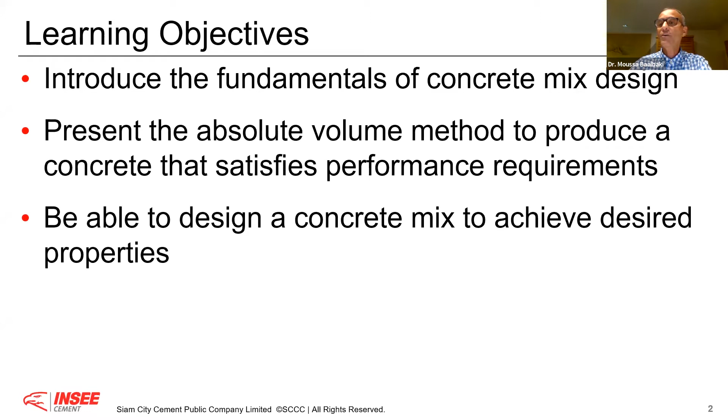It will be, for example, to design for the hotel terrace in Galle Face a slab that is a reinforced concrete slab. You are requested to design this reinforced slab. It is a 200 millimeter thick slab, exposed to airborne salt but not in contact with seawater. That is important to mention.

The specified characteristic strength will be 25 megapascal at 28 days on cube, and the slump requirement will be 15 centimeters plus minus 2.5. Now, from statistics, there will be more than 30 consecutive tests available, and the probability that the average of 3 consecutive tests is smaller than the specified characteristic strength is 1%, with 2 MPa standard deviation.

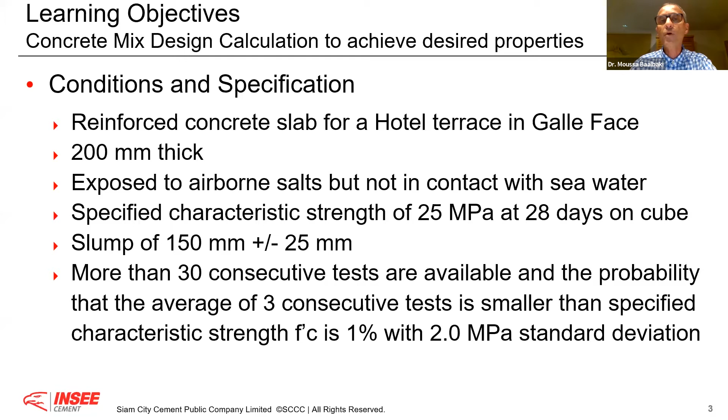I just started with this slide because I want you to see already from the very beginning what you could expect for the next, let's say, hour and a half. That will really be the objective here. I would like that at the end of this session, those who are not used to concrete mix design will be able to translate all these requirements into a specific concrete mix. That is really one of the most important learning objectives for this session.

Now, if you talk about concrete, it is a very simple, but at the same time, very complex material. It is simple because very often people abuse the simplicity of concrete, because when you look at the ingredients, with 4 simple ingredients we can find in nature, the aggregate, the sand, the water, and the cement that is processed, you can produce a concrete where the range of compressive strengths can go from 1 megapascal to 100 megapascal.

You see, this is really what is important to say here. It is simple, yes, but the technology content is very important.

I just try to do some analogy. You have a flour, a good quality flour. You can give it to one person who will make very nice, tasty bread. Another one, it will not be exactly what you expect. Therefore, the difference will not come only from the ingredient. The ingredients are important, we will see it, but what is important is really the technology content.

Therefore, it's not as simple as very often people think. A concrete mix is not a concept of 'I have done it before, I can copy paste it.' That is not the concept we should use.

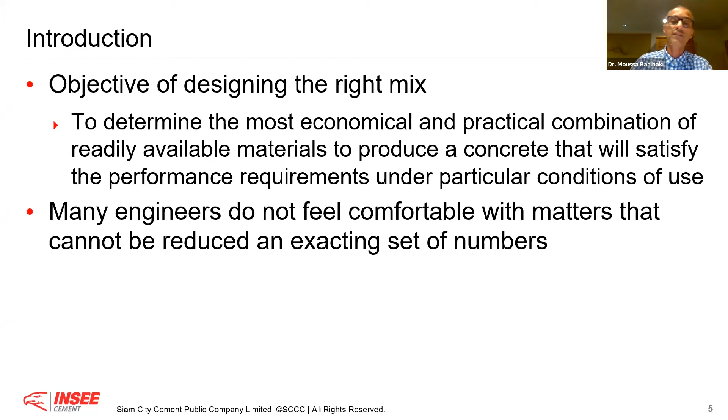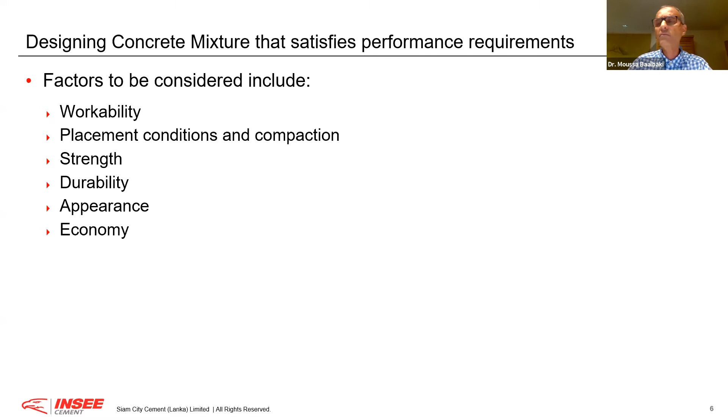Designing concrete that satisfies performance requirements, I have here six of the most important properties. Workability means how easy I can place a concrete, and very often we talk about slump. I'll show you according to EN standard there is another way to express workability. Also the placement, we can consolidate concrete in different ways.

This is why very often when we design concrete, we should understand upstream, before the concrete arrives downstream, how it's going to be transported, how it's going to be placed, and how it's going to be consolidated. These are really important because if we don't take this into consideration - I like workable concrete, but if I place it knowing it will be highly vibrated, I can have segregation, I can have bleeding problems. So this is all important to take into consideration.

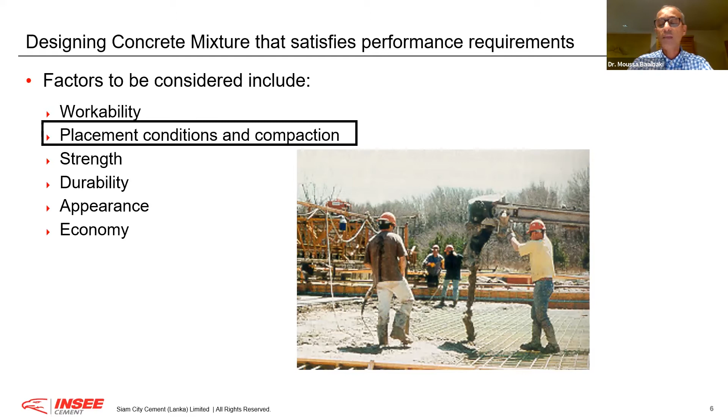After that, the strength. As an engineer, we know this is one of the most important engineering properties. When we talk about structural stability, mechanical stability, we talk about compressive strength - this is really the strength of concrete. Concrete has a lot of advantages and benefits, but probably one of its weakest points is tensile strength, that's why we put reinforcement. But when we look at the strength of concrete, you can easily design concrete up to 100 megapascal.

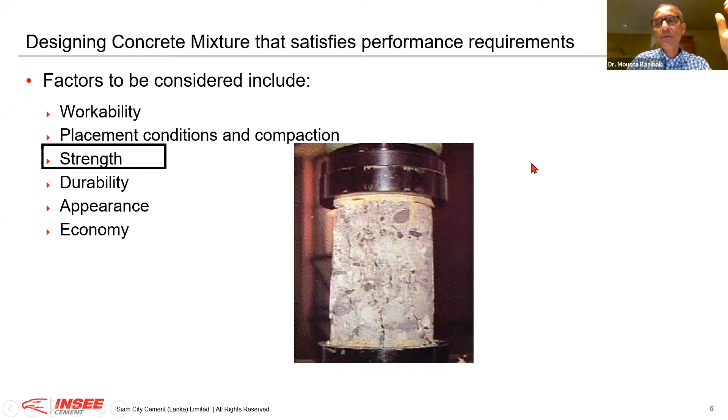One other aspect important to satisfy performance requirements is durability. The aspect of durability is really important, and we often miss this because when we design, it has to last the intended use of the structure. For example, if I build a bridge for 50 years, I don't want that after 25 years I need to repair the bridge - this has a very high social cost. Today most bridges around the world are even designed for more than 75 to 100 years. That's why durability has to be taken into consideration.

We will see it. After that, appearance - the color. As an architect, I started my studies in architecture, and with concrete we are able to give more feature to a building. If we take, for example, fair face concrete surface, we can have warm color, we can have cold color, and concrete is the best material for that. You see, for example, in this school of architecture in Marne-la-Vallée in France, there's fly ash on the right side and slag on the left side - that's beautiful, that gives volume. In terms of aesthetic, I would say nobody will deny this is really a kind of art.

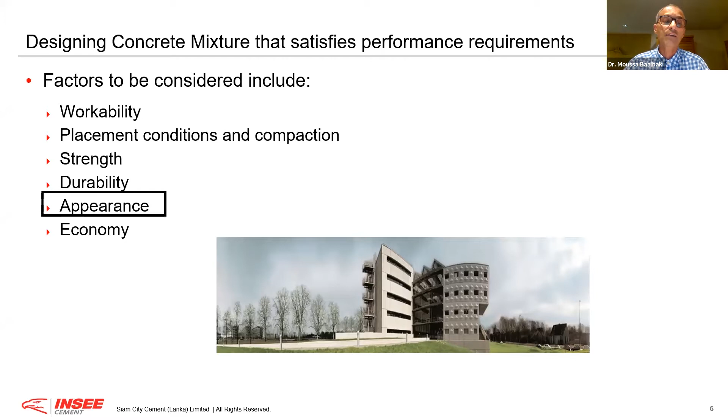Also important is the economy part - we have to be cost effective, of course. But I would like to mention something very important here.

We are consumers. If I go tomorrow and buy a TV, they'll give me the latest technology with maximum 2 or 3 years of guarantee. If I buy the best tire for my car, the Pirelli or whatever state-of-the-art tire, the guarantee is maximum again 3 years. I'll pay about $100 US for one tire, and that latest technology will last 3 years. When we take concrete, if we design it correctly, it can last minimum 50 years. Therefore concrete is a very noble material for engineers. And when I say 50 years, this is for a cubic meter that will cost you less than $100 US - 2.5 tons of different materials that will last 50 years.

This is why if you look around you today - schools, our houses, our universities, our hospitals - whatever you look around you is built with concrete.

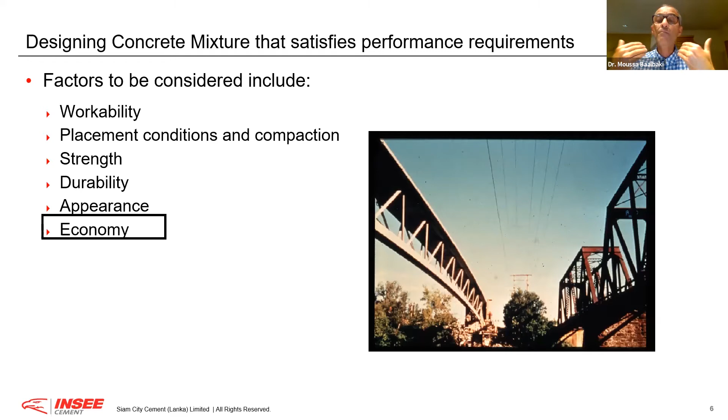In front of you, you have challenges. You need to build sustainable, performing infrastructure. Sustainability becomes a very important element in concrete mix design. You have to think about where the solutions are. Therefore you need to think performance-based and not prescriptive-based.

Now, in terms of method of proportioning, when we design a concrete mix it involves: the establishment of specific characteristics, as I said, in terms of strength and workability, the intended use, the aspect of exposure condition, and also the selection of proportion of available materials with the greatest economy.

You see, I mentioned available material, and that is very important here. When I talk about availability of material, today we are more going toward circular economy.

And when I say circular economy, we are not anymore dumping. We cannot afford anymore to dump end-of-life material. Therefore, concrete—when I come to available material—the second life of concrete is as a great aggregate. Yes, it's a great aggregate.

You see, this is an issue. The implication is if we dump it, we are going to create a big mess. Therefore, the opportunity is to take this end-of-life demolished concrete, turn it into aggregate for example, and design a concrete taking this recycled aggregate. This is just an example.

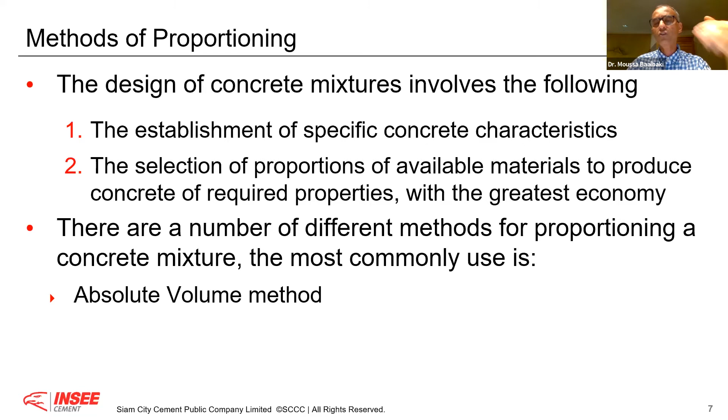The method of proportioning, absolute volume method, is very simple. Everything is transformed to a cubic meter, made of 1,000 liters. You have your constituents: cement, aggregate, water, and sand content, and a certain porosity. I'm not talking about admixtures here.

I will come to the part of admixtures, because the volume there is very, very low. But if I take the big volume in my cubic meter of concrete, these are five somehow constituents—4 constituents plus the porosity. If you know the bulk density of each of them, if I divide the mass by the density, I will have my volume. And if I sum up all this, I should get my cubic meter.

I would like to make a small break here, because when I call my ready-mix guy and ask for concrete, I will never tell him I need 2 tons of concrete. You agree with me? I will tell him I want 2 cubic meters of concrete, therefore it's volume. But of course, in some segments, if I take for example the individual house builders, the retail segment in Sri Lanka or in a lot of countries...

We still see people, when they mix on site, they mix volume batch. They don't weigh, they go volume batch.

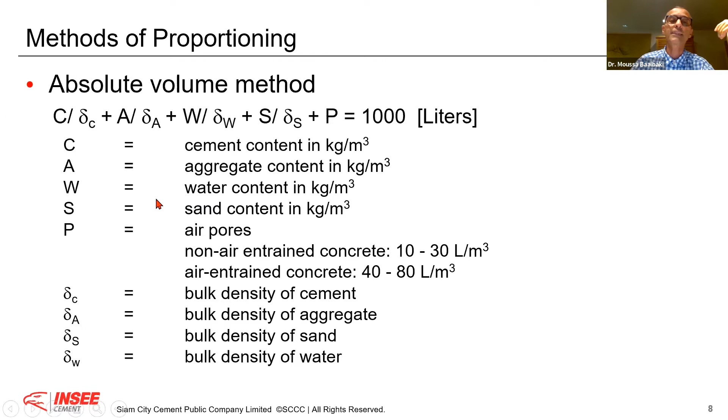A concrete, as I said, we express everything per cubic meter. If I have, for example, 1 cubic meter of concrete with aggregate, with sand, with cement, with water, each of them will occupy a certain volume. Say air will have 6% of air, this will be 60 liters. Water, 150 liters. Knowing the density of each of them, I can get the kilogram per cubic meter. Therefore, I can get really for 1 cubic meter of concrete the constituent kilogram per cubic meter.

Therefore, always when you are somehow designing a concrete, you should come up at the end with kilogram per cubic meter. That is important.

Now, selecting a mix characteristic, you have to take into consideration the intended use of the concrete, that is one aspect, and the second one is the exposure condition. These are two important elements that you should consider: the intended use, and second, the exposure condition. Is it a house? Is it a bridge? And where is this house? Is it in Kandy or is it in Galle Face? That is important. This is what we talk about exposure condition.

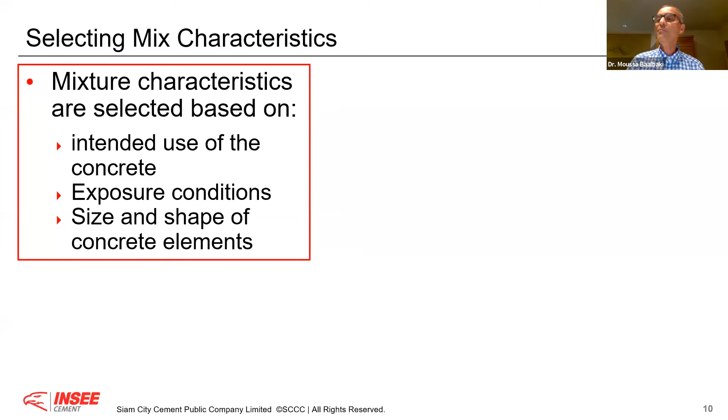That is where we will start. Now this is why we will go through what I call the important steps. We start with step 1: as an engineer, I need to know what is the strength requirement.

This I cannot invent, I should know the strength required according to the design. After that, there is one important element, the water cement ratio. Because there is a law, a very simple law in concrete technology, up to 50 megapascal: there is a linear relation, they call it the Féret relation or the Abrams relation, where the water cement ratio is linear with the compressive strength. When you reduce your water cement ratio, you increase your compressive strength, or when you increase your water cement ratio, you reduce your compressive strength. Therefore, it's almost linear, and there is no universal one, it will depend on the raw material: cement, aggregate, sand that you are using, and the mix.

After, the coarse aggregate. You see, coarse aggregate is not inert. Coarse aggregate plays a very important physical role in the concrete, because coarse aggregate will occupy a big volume of your concrete, almost, I would say, 40% of the volume, even sometimes more, occupied by the coarse aggregate.

After knowing the workability, we have to know how much water I should add in my concrete mix, because water is a very important ingredient - it will hydrate your cement. We'll see this in the second webinar. But at the same time, if we put too much water, it's not good for the concrete. The cement content, how much cement I should put, is also important to know.

The cement type - there are different types in the market. It's very important to understand why we have different types of cement; there is a good reason for that. Admixtures are also important to use when available, for example water reducers, or what we call super plasticizers, because those admixtures will help you reduce the amount of water. That is very important to take into consideration.

At the end, when we go from step 1 to step 9, we are able to fill what is left in the cubic meter with the sand. So these are the 10 important steps, and after the 10th step you do what you call the moisture correction.

Why do I say moisture correction? Because if you go to the job site and look at sand or aggregate on the piles, very often they are not what we call saturated surface dry. Therefore they are either wet or too dry. You need to do a moisture correction to assure that you always have a mix design with the same water-cement ratio.

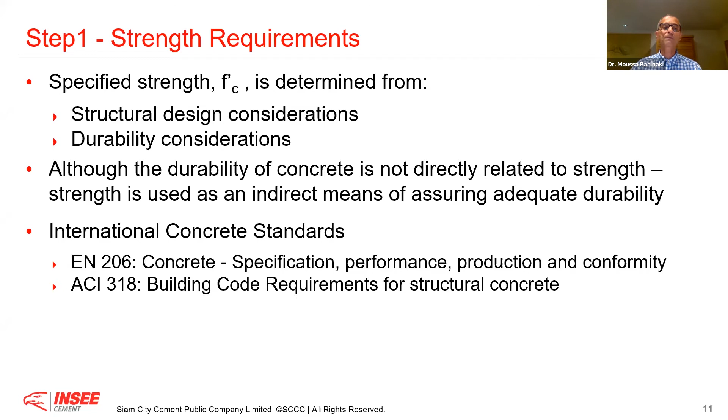When it comes to EN206, we need to know how to design and what elements we need to specify to let the producer, for example in concrete, fulfill the requirement of the engineer or contractor requesting it. The EN206 gives indication on how to design concrete with a service life of at least 50 years, without major intervention in terms of repair or rehabilitation.

Of course you can go above 50 years, but if you follow the different steps, you should not have any problem. First you have the class of compressive strength. Strength is important, and when I design a concrete this is the most important engineering property: the class of compressive strength. Second is the class of consistency, which is fresh concrete properties, for example which slump I need. That is important, I should specify.

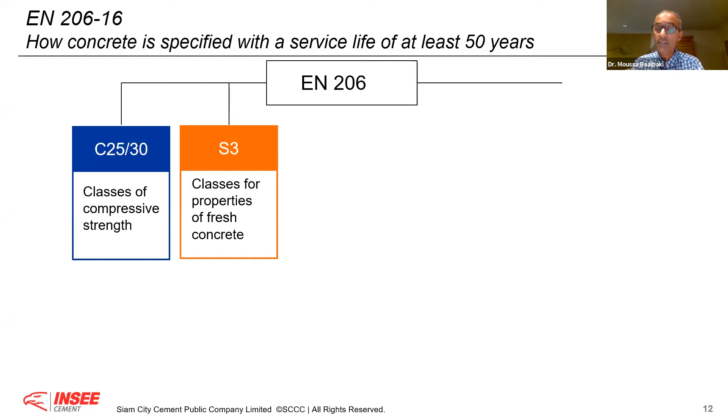The third one is the class of chloride, because you can have concrete exposed to chloride like marine environments. It could even be not marine - you can use chloride to melt snow in the mountains. This chloride can somehow, to a certain extent, have a negative impact on corrosion. But at the same time, in your concrete you have to limit the amount of chloride, for example 0.1%, very often used, up to 0.4, depending on if the concrete is reinforced or post-tensioned. Therefore the class of chloride content is defined in the standard.

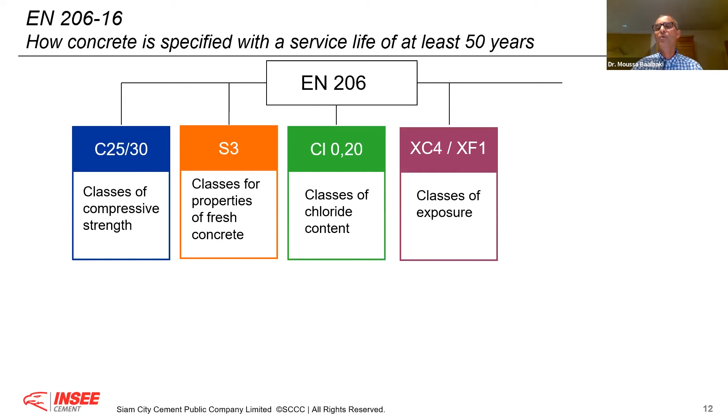Now very important is the class of exposure. This is very, very important, because when I design the concrete I should know, during its lifetime, what kind of exposure this concrete is going to withstand. Is it going to be wet always? Is it going to be always dry? Or is it going to go through different cycles of wetting and drying? Is it going to be exposed to chloride, to carbonation, to CO2, to sulfate, whatever it is? It's very important to consider this aspect in concrete design.

Last but not least is the maximum size of aggregate. In Europe, according to EN206, when I call the ready mix I have to specify these 5 boxes: a C25/30 concrete, an S3 class of consistency, a chloride class 0.2, an XC4 exposure class for example, and a maximum aggregate size of 32. The producer takes this input and translates it into a concrete mix design - that is what I would like to do with you.

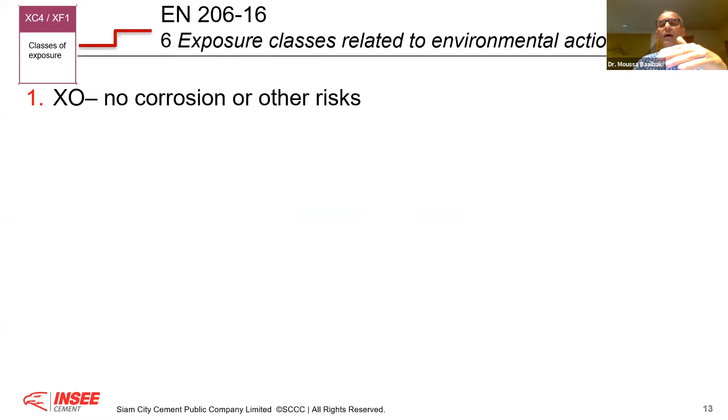Now when I take the exposure classes, there are 6 exposure classes according to EN206. When you look at the ACI, the American standard is similar - not exactly the same, but very similar. You have, when there is no corrosion or risk, this is X0. Very often these are for lean concrete, or for some foundations where the soil is not contaminated and it's not reinforced - in this case we can go for X0.

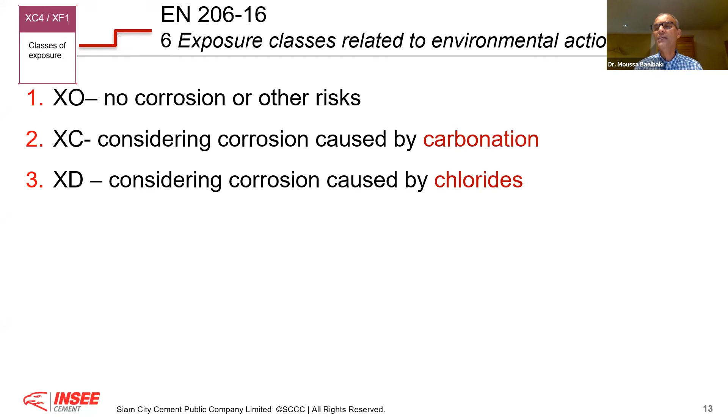XC is when you have problems with carbonation - if your concrete faces an environment where soluble CO2 can enter and carbonate the concrete. We will see this - this is a corrosion mode. The second mode of corrosion is the XD class. XD is when you have chloride, but not coming from the seaboard like XS. Chloride, as I said, can come from icing salt, or it can also be a byproduct from industry.

So chloride can come from different sources, but also from the sea. In Switzerland we don't have sea, so the XS class does not exist in the EN206 with the National Amendment of Switzerland. But in Spain, they have XS because Spain has the Mediterranean Sea. After that, you have frost. In Sri Lanka we don't need frost, but in a country like Switzerland or Canada, they have winter, with many cycles of freezing and thawing, and they also use icing salt to melt snow on roads.

Therefore, you need to take this into consideration. Last but not least is the chemical attack, from the soil, from the groundwater. It's very important to see, for example, if you have some acidic attack, if you have some sulfate, these are all very important to take into consideration.

Now, I am not going to go through all of them. I will just consider the XC. If you understand the XC, you will understand all the rest, because I will show you a table, they are all based on that. I will not go too deep, because we will not have time to explain the mode of deterioration of each of these exposure classes. This could be another topic.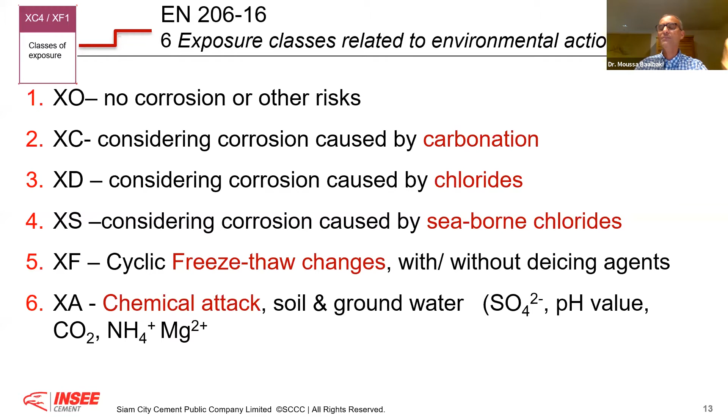Now, when I take the XS, this is chloride from seawater. We have three classes: XS1, XS2, and XS3. XS1 is when the structure is near or on the coast. Example, Galle Face for Sri Lankan people, because I know there are some participants from abroad, from India, from Korea, from Malaysia, I don't know from where also. But here in Sri Lanka, we have Galle Face, for example.

It's a very beautiful avenue and is facing the sea. Therefore, all the buildings, all the concrete that has been built in the area of Colombo need to consider a minimum exposure condition of XS1. That is important.

Second one is when the concrete is part of a structure, either permanently submerged or in the tidal zone. Can be a bridge, for example. Therefore, if it is permanently submerged, you take the XS2. And if it is in the tidal zone, or spray zone, you take XS3. So you see, it's not just about chloride from seawater. It depends where your element is.

Now, there is some recommendation. This is recommended in the EN 206. It's not mandatory, but it's recommended, and it's good as young engineers that when you start to design your concrete, this is a very interesting table. There is more than 25 years of back experience backing this table. That is very interesting because you can use it.

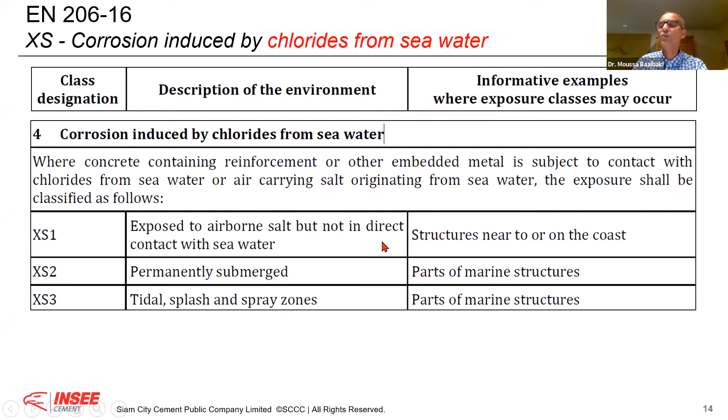Even if we are at 25 kilometers from the coast, therefore I will say Colombo and the big Colombo, normally all the concrete needs to be designed minimum with XS1. This means water cement ratio should not be above 0.5. So you see, 0.5, this is one condition.

And we are talking about strengths. You cannot design with less than 37 megapascal. Even though from a structural point of view, you can design with 25 megapascal, that is enough. But due to the fact that you have exposure condition with a certain severity, you need to increase your design to 37 megapascal.

Therefore, we are talking about the same thing. You have different cases, like if you go to XS2 and XS3, this is either submerged in water or in the splash zone. You see the strength is 45 megapascal. Even though probably 35 megapascal will be enough, or 30 megapascal will be enough. But this is not the case. You have to take into consideration the exposure condition.

Now, if I take the ACI, you see, they have 4 exposure classes. They don't have 6 because they already include in each of the classes what we have in the European standard, the X0. That is what they call F0 for frost, S0 for sulfate, that is our XA. This is our XF according to the European standard. This is in contact with water.

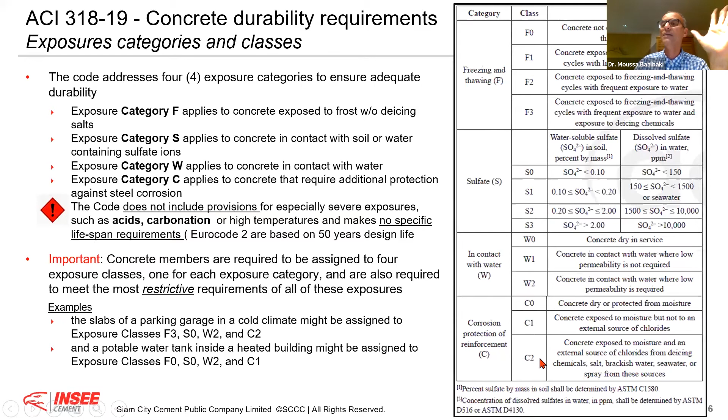Therefore, the engineer needs to consider all of them and take the worst case scenario. They also have limiting values, exactly like in the EN. What they don't have is a restriction on the cement content. In the EN, the European standard, you have the minimum cement content, the maximum water cement ratio, and the minimum compressive strength. In the ACI, they put only requirement on the maximum water cement ratio and the minimum strength. They don't put restriction on the minimum cement content. That is really the big difference.

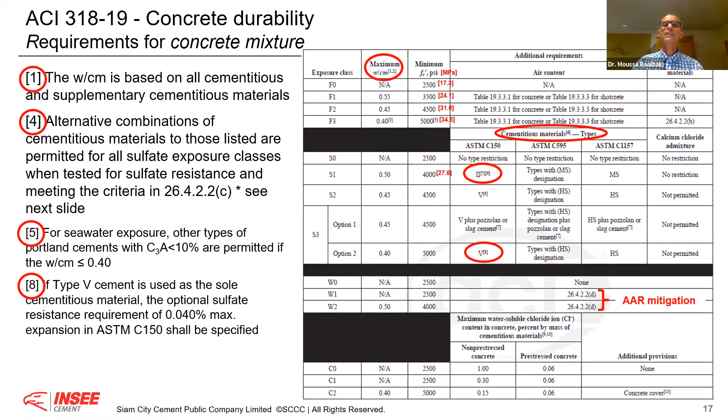Now, as an engineer, when you design, the required strength should be equal to the specified strength. So if I'm specifying 30 MPa, I have to take an allowance for variation in materials. This is why, if you buy concrete, you need to buy it from a producer who has a very good quality assurance system, with a very good standard deviation, with enough number of consecutive tests for the mix he is developing for your project. That is important, you have to take this into account.

For example, in Sri Lanka, whenever you design 30, you request 40. I will explain why. This is important because of the normal distribution for standard deviation. With standard deviation, if you specify, you have to add, for the design, a factor K multiplied by the standard deviation.

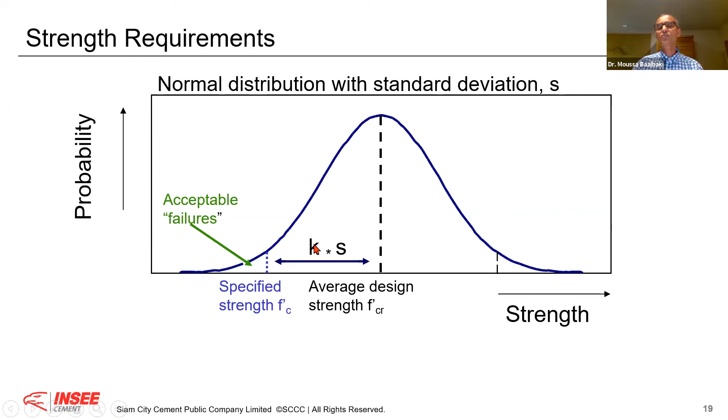This factor K, if the number of consecutive tests is more than 30, equals 1. Therefore, a professional ready mix operator normally will just add the standard deviation because the K number should be 1 for him. Now, according to ACI 318, if you look at the Sri Lankan cases, you will have also very similar conditions. If the concrete is below 45 or above 45, you have different conditions.

The required strength will be specified plus 1.34 standard deviation, or another equation, depending on whether the probability that the average of 3 consecutive tests is smaller than the specified strength is considered. Therefore you take this relation. That is really important.

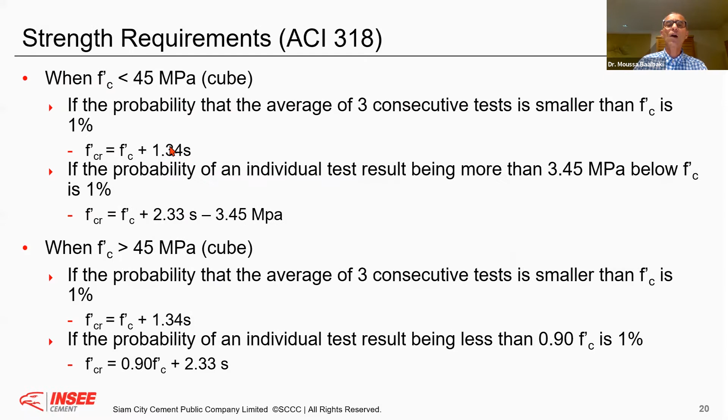Now, if you don't have 30 consecutive tests - 30 consecutive tests and more gives K factor of 1 - if you have only between 15 and 29, depending on the number of tests, the fewer tests, the higher the K factor. It means if I have 50 megapascal, it should already be 55 plus the standard deviation.

This is why very often we go to worst cases when we don't have a good statistic or good quality assurance system. Designers, specifiers or engineers go with the maximum level of security. Unfortunately this has a certain cost, but this is how it is.

This is why, if I look at the cement utility factor in the bag market - how many kilograms of cement I need to get 1 megapascal - normally in ready mix operations we need less than 10 kilogram, we are around 7 to 8 kilogram per megapascal. But if I go to the retail market, for my 20 or 25 megapascal, very often I need 13 kilogram. I'm wasting a minimum of 3 kilogram per megapascal, just because the technology content I'm using is not the optimum one. It's really not about the cement.

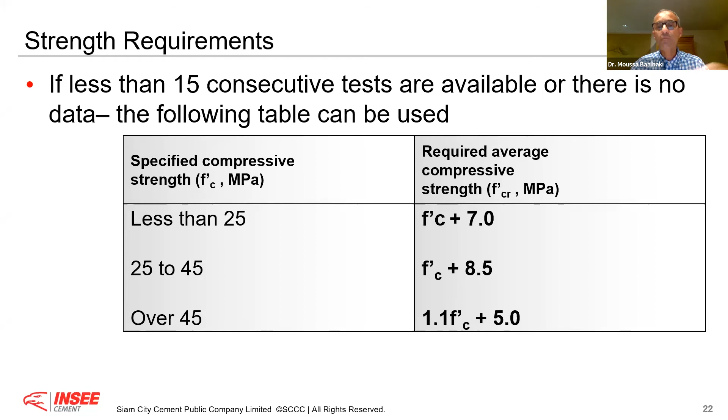Concrete, for example, that needs to be bleedless, concrete that is easy to place - do you design this type of cement differently than concrete that doesn't need these properties? Therefore, this is for the strengths.

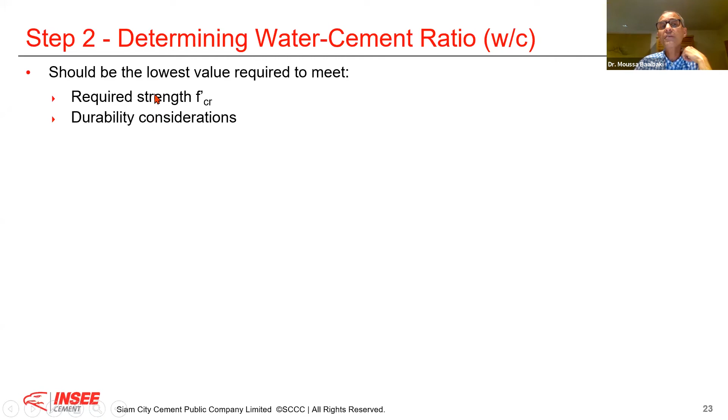Now, when we come to the determination of the water cement ratio, you should take the lowest value that is required to meet either the required strength. For example, I design my slab, I need 25 megapascal. But if my slab is exterior slab, I have to take durability consideration, and suddenly it's not 25 megapascal, but 37 megapascal. Therefore, I need to consider the water cement ratio that is the lowest to achieve the required strength or the durability consideration.

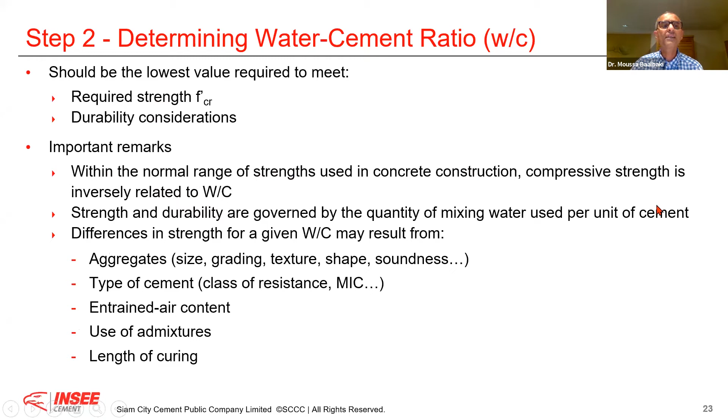Now, an important remark here: within the normal range of strengths used in concrete construction, compressive strength is inversely related to water cement ratio. This is what I said, that you have a very good relation between compressive strength and water cement ratio. That is very, very important, that we need for a set of constituents to have this kind of relation between compressive strength and water cement ratio.

Also, the strength and durability are governed by the quantity of mixing water used per unit of cement. This is why, very often, people put too much water. Therefore, if you have some negative effect, it's not always because of the cement or the aggregate - it's because you put too much water.

Difference in strength for a given water cement ratio may result from the aggregate. If you don't have sound aggregate, if it's flaky or has a really bad shape, or the type of cement - you use a low strength class like 32.5 instead of 42.5, for example. If you don't use mineral components, you don't develop enough strength. If you are entraining air, if I have 2% or 5% of air, it's not the same - the more air I put in, the more strength I lose.

Use of admixtures - I can use some admixtures, and in this case, I can really reduce my water cement ratio. And the length of curing - strength develops with time.

And why are we sticking to the 28 days? Because we are used to working with OPC. When a lot of technology was developed with concrete, it was the time where OPC - and we know with OPC, you develop at 28 days almost more than 80 to 90% of the strength.

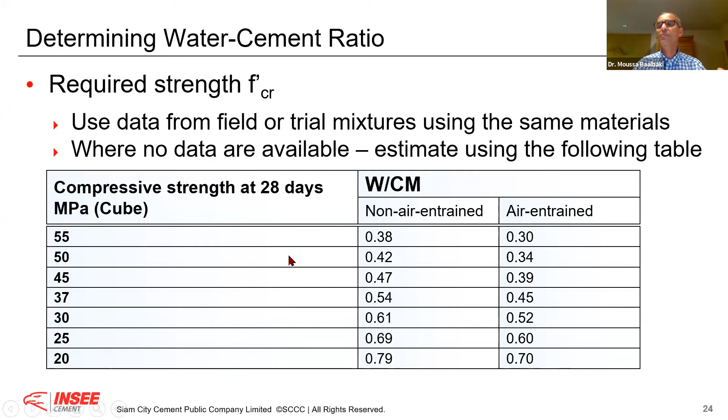Your porosity is percolated. I can produce a 25 megapascal concrete that is dense with good permeability, or another 25 megapascal that is very permeable. That is exactly what we should keep in mind. This is why those tables exist. It's not about permeability only, it's not about compressive strength only.

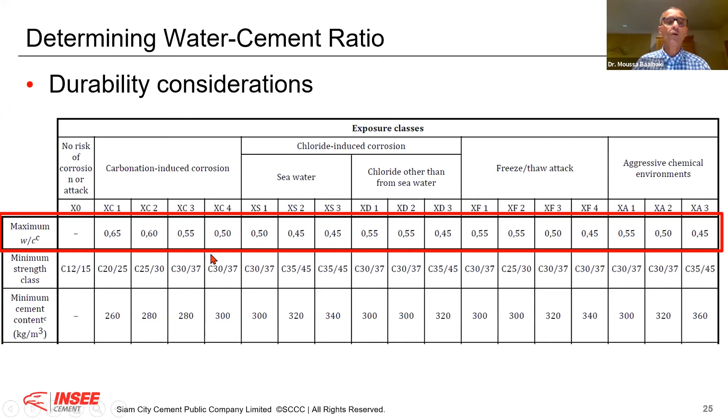First, you optimize your aggregate content in your concrete, because the aggregate will never shrink. This is the anti-shrinking component in your concrete.

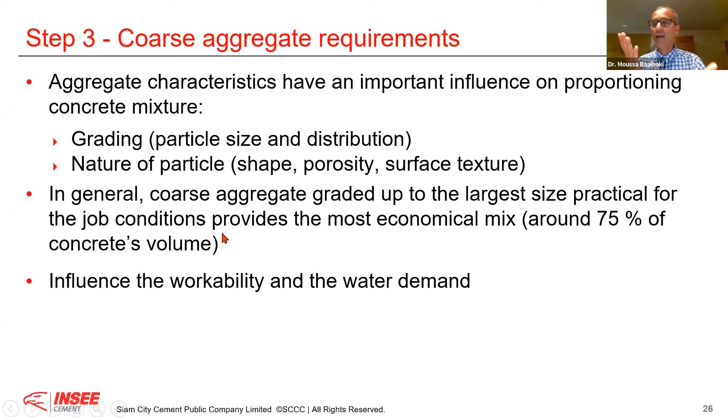But if you reduce your aggregate, you increase the volume of paste, and the concrete will shrink. It also has an influence on the workability and the water demand from the coarse aggregate. So you have to find out the optimum. We will see what is the optimum.

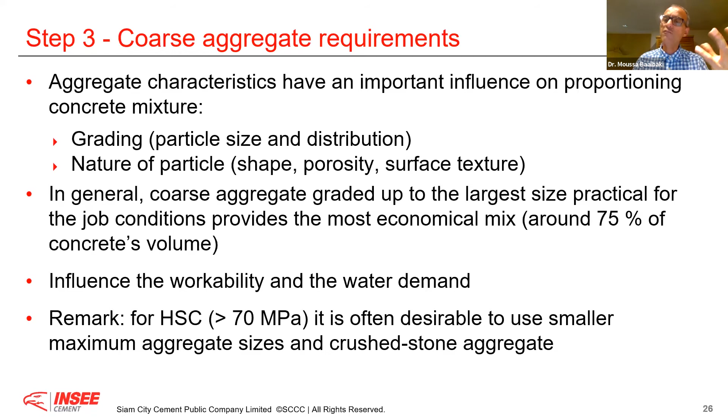Because when you reduce the coarse aggregate size, you increase the specific surface, but it's not a problem because you have enough paste. Your cement content is high.

Therefore, also, depending on your reinforcement, the distance from the reinforcement to the edge of the mold, the distance between two reinforcements, the size of the concrete element, whether it's on grade, whether you have to pump the concrete - these are all information that you need to consider for the maximum size of aggregate.

For example, in a slab, if my slab thickness is A, the maximum diameter should be 1/3 of the thickness, maximum, I cannot go above that. Or if I'm pumping concrete, it should not be more than 1/3 of the diameter of the hose, and never more than 37.5 millimeters. Anyway, nobody will pump that - in Switzerland, we can pump even a 32 millimeter aggregate.

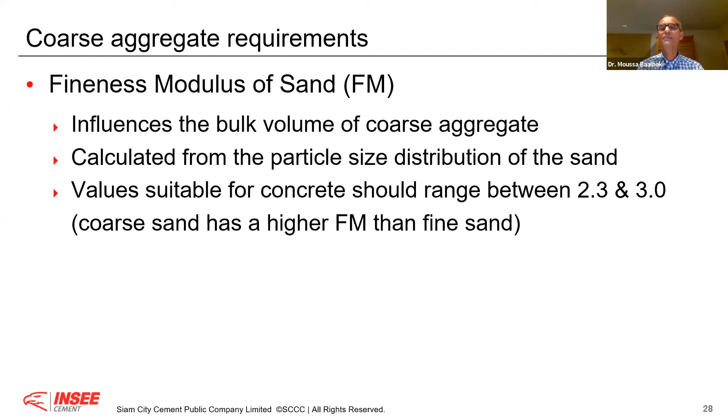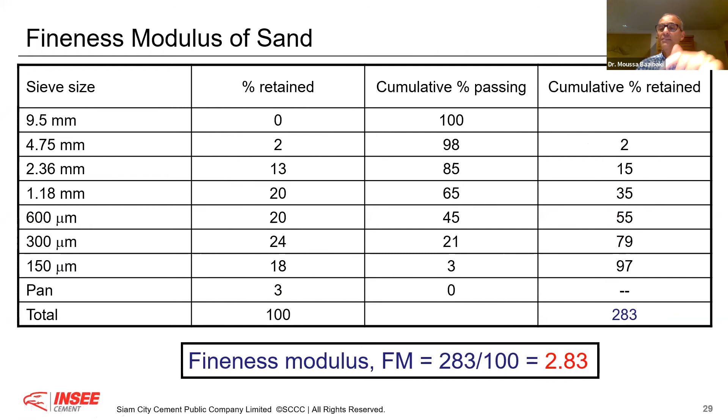You can experience that if you walk around a job site, you will see it sometime. Modulus of fineness is very simple: you have your sieve, your opening, percentage retained, you get the cumulative passing the sieve and the cumulative retained. If you add all the numbers between 4.75 millimeter and 150 micron and divide by 100, this is your fineness modulus, 2.83. Very simple, but this is a very important characteristic of the sand, as you will see in the next slide.

Based on this, I will know how much coarse aggregate I can put. The second important element is what I call the dry rodded bulk density of the coarse aggregate.

If I have a coarse aggregate with different shape, flakiness, elongation, or a better form, or a different grading, and I take a container, a bucket of 10 liters, fill it and compact it in 3 layers, then weigh it - the better my grading and the more favorable my aggregate shape, the higher will be my dry rodded bulk density. This is a good indication integrating the physical aspect of the coarse aggregate. Sometimes you can go down to 1,550, or up to 1,700, 1,800.

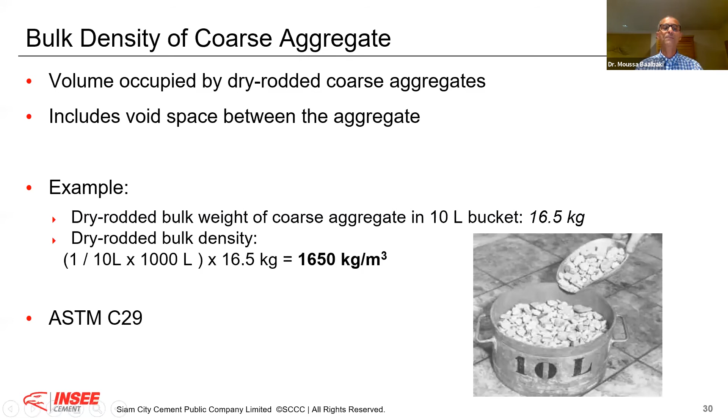A favorable coarse aggregate increases this value, considering it's from the same parent rock. You have a standard for that, the ASTM C29.

This is a table that gives you the bulk volume factor for the coarse aggregate. In green here is the fineness modulus. You need to know the fineness modulus of your sand - I know it. Now I should know the maximum size of aggregate - I know it. For example, with 25 millimeter aggregate and a fineness modulus of 2.8, I have a bulk volume factor of 0.67.

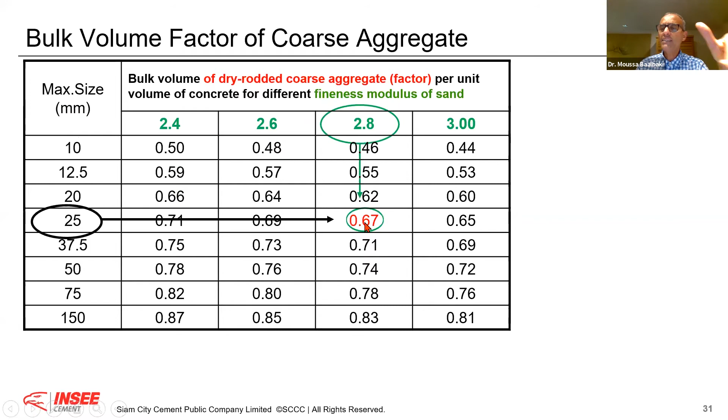Now this 0.67, I multiply by the dry rodded bulk density, which was 1,650 in the case we have seen. Therefore, in my mix, if I take this sand and this specific aggregate, I can go to 1,105 - sometimes I cannot go more than 1,000 even. This is why this factor is very important.

Therefore we now know how to get the amount of coarse aggregate. You have to keep in mind that if you have to pump concrete, you have to reduce very often 10% of coarse aggregate, or if you have a slip form, you increase by 10%. There is some recommendation for this in the standards, and also by practice we know that.

Now, air content - very often you have to entrain air, but in our case we do not entrain air in Sri Lanka, or in India, or in any country in this region, because we don't have a frost problem. Only if I go to North India probably.

If, for example, I take the case in Sri Lanka between 20-25 millimeter coarse aggregate, you see I can consider between 1.5 to 2% of air in my concrete. Of course every concrete will have a certain volume of air - that will be like entrapped air. That is really what we can consider.

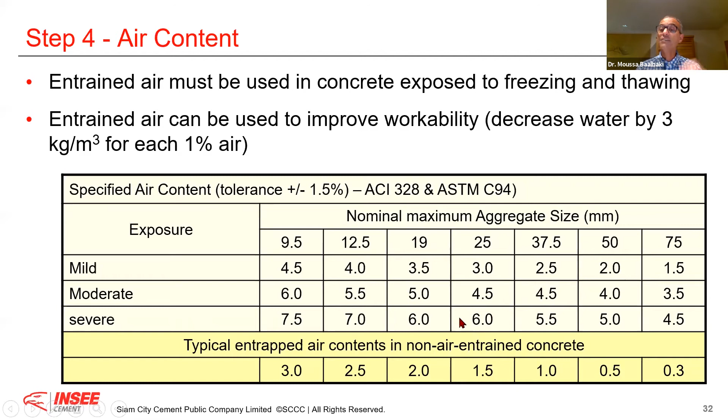But for example, in severe frost conditions, in Nordic countries, they can go up to 6% of air with this type of coarse aggregate maximum size - almost 4 times more air, but this is not entrapped air, this is entrained air. It's totally different - you use admixture to entrain air.

Now, workability requirement - the ability for the fresh mix to be transported, placed, compacted, and finished. We remember the 6 requirements - this is a very important one. Otherwise, you can produce a very good concrete mix, but when it comes to placing or finishing or consolidating it, the conditions are not favorable. The slump is indicative of workability when assessing similar mixtures - this is why we use, for example, the slump test.

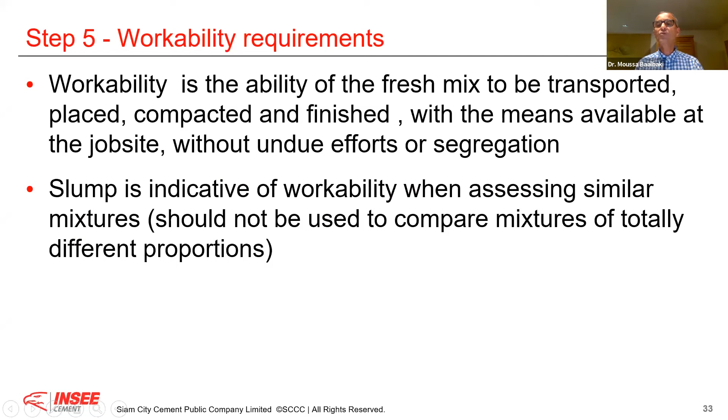Now, in EN 206, there are 3 different ways for normal classes of consistency. There is what you call the S class, like for example in Portugal, France, Spain, Sri Lanka, and India - but in India it will be different because they compact the cone in 4 layers.

All other countries like Sri Lanka, we compact it in 3 layers, 25 times. In India, they will compact it in 4 layers. Therefore, the numbers are not the same. For example, 115 millimeter slump in Sri Lanka will be different than 115 millimeter in India.

This is why I always say it's really important. When we compare numbers, you need to be sure that the numbers are comparable.

So you see, you have different classes of consistency. But as we know very well in Sri Lanka, most of our concrete, if I take our ready mix for example, more than 90% of our concrete is S4, the highest class of consistency. You see the S5 here, more than 220, this is not recommended.

You see, the small 'a' note says it is very difficult to consolidate those concrete and to keep good stability. Better to go below 220. And in Sri Lanka, we have this class of consistency. If I look at the volume of concrete we produce at INSEE concrete, I would say more than 90% is this class of consistency. And more importantly, with time, in Sri Lanka we always ask for 3 hours. It's very, very challenging, okay?

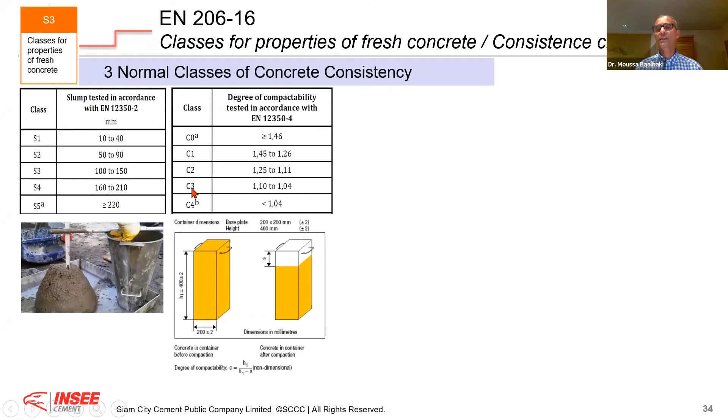The degree of compactability is the ratio between H1, the height, divided by H1 minus the slump. That is the degree of compactability. The lowest the value, the higher the slump of the concrete. It's normal — if I place this concrete, compact it, and it's not slumpy, it means the concrete already has high compactability.

And also there is what we call the flow diameter. Sometimes in Sri Lanka we use it, but we don't use the right cone. We use this cone to take the flow. Normally the cone you use for the F class gives a smaller flow diameter.

This is the DIN cone, not the Abrams cone — it's a DIN cone. Therefore it's different. Therefore you lift the cone and you compact, giving a tap, 15 taps here, and therefore you measure the diameter.

And there is also what we call self-compacting concrete. These concretes normally flow and go — you don't need to consolidate them. Therefore, there is a special test for them: they use the Abrams cone. You fill the cone, you lift the cone, but without vibration, without compaction, and you measure the slump flow. We call it slump flow.

Here also you have class of consistency. You see, it's not as simple as a person might consider. Therefore, you have class of consistency, and within the class of consistency, you have the type — how you measure the consistency of your concrete. Okay?

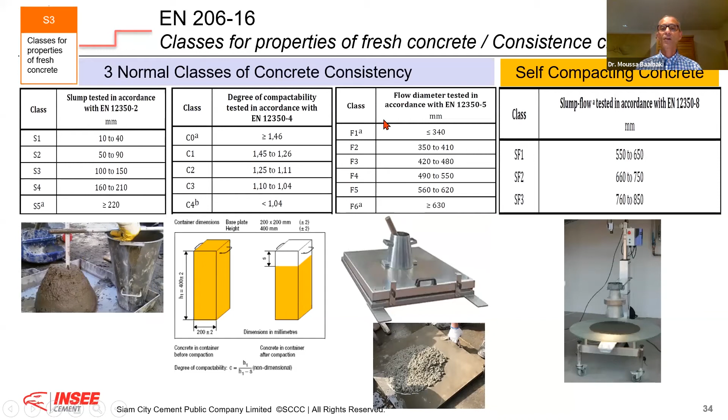Therefore, step number 6 is the water content. The water demand, as you probably have, is influenced by the slump requirement. You see, what is the slump I need? What is the aggregate size and shape?

Now we know how to get it. The air content, we know. Type and content of cement, that will come later — what is the type and what is the content of my cement? The temperature and the admixture — these will all influence the water content.

Okay, now if I take the slump, as I said, very often you need a set of materials to do this type of experiment. But you can take this table to start with. It's a very good table — very often I use it.

It works very well. For example, if you take 150 to 175 millimeter slump for non-air entrained concrete, if I have a concrete with 25mm maximum aggregate size, I need to put about 200 liters of water. That is why very often in ready-mix operation we use super plasticizer — we can cut by almost 20% the amount of water we add.

It's okay, so you see, depending on the class of consistency and depending on the maximum size of aggregate, you have different amounts of water you can use for non-air entrainment and with air entrainment. When you entrain air, because air has the ball bearing effect, here I use 202 liters, here I use only 184 — almost 10% less.

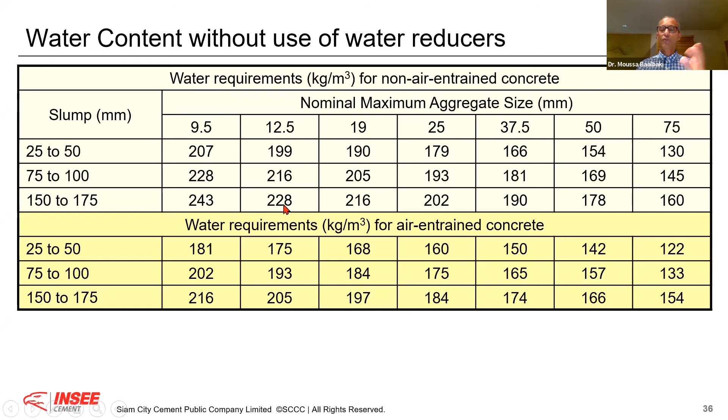Now, cement content. You derive the cement content knowing the water content and the water cement ratio. Now you can calculate the cement content. Very simple. You just have to divide the water that is needed for the required slump by the water cement ratio to fulfill the strength and the durability.

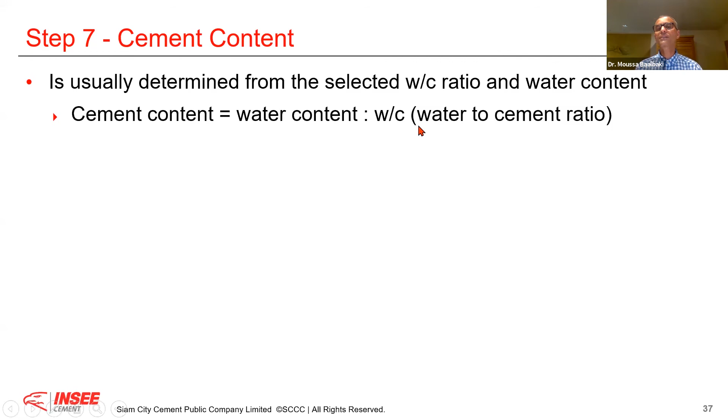Now, also a minimum cement content may be specified for the purpose of durability. We will see it probably in the next slide. For finishability, for example, when you have a slab, very often we increase the amount of cement to improve wear resistance. And for the appearance, for vertical surfaces, we need a little bit more paste to have a very nice finishing.

Therefore, also excessively high cement content should be avoided for economy. 60% of raw material cost in a cubic meter of concrete is the cement cost. Therefore, do not abuse it, don't put too much cement. This is not good.

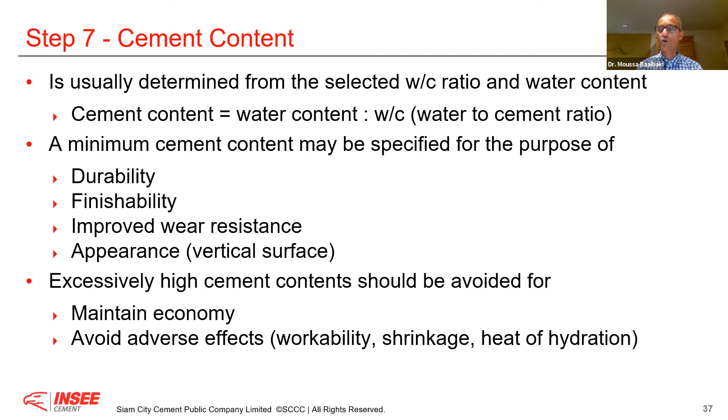There's an adverse effect, because if you add more cement, there's more heat of hydration and so on. That is why if you produce a concrete above 40 megapascal, normally nobody will do it with OPC. If you do it with OPC, you can have adverse effects, heat, shrinkage, and so on. Or if people use OPC, they will add fly ash somehow.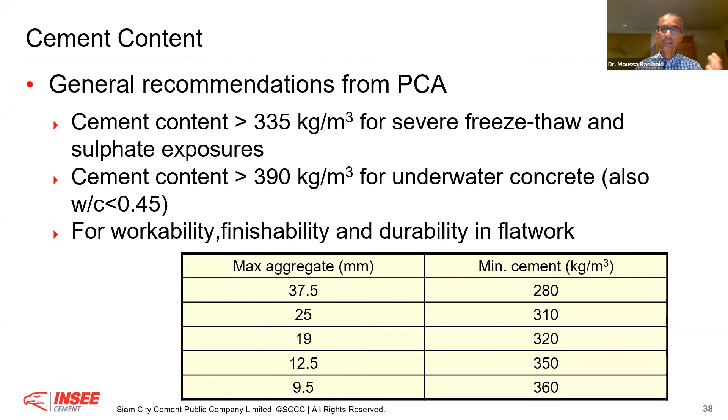Now, also there is some recommendation, for example from Portland Cement Association, if it is frost resistant, which is not our case, or when it is underwater concrete, you need to have more than 390 kg of cement. Or if you are really concerned with finishability and durability in flat work, if I take the case of Sri Lanka with 19mm, 20mm, 22mm aggregate, we cannot go below 320. We cannot go below 320. That is exactly the case in Sri Lanka. We have even more than that.

Now, the type of cement. Here again, it's really important that we discuss the type of cement, because cement is not only about compressive strength. Of course, the cement is responsible, is the binder, is really the glue of concrete. But cement is more than that. Cement can provide you low heat, better workability, better economy, longer strength, better durability. You have types of cement that can give you this type of feature, advantage, and benefit that you cannot get from pure OPC.

You cannot get it. If I have to do a foundation, I go pure OPC, I will have full of thermal cracking, just a very simple example. Or if I'm in a sulfate environment, I have OPC and my C3A is above 5%, I can have sulfate attack.

This is why I say it's very important that the type of cement, this is why in the next webinar I will discuss more on the type of cement, so that you can make the link. As I said, it's not about the megapascal. If it is only a question of megapascal, the challenge is very simple. Very easy to achieve 25 megapascal or 40 megapascal. This is not a big challenge.

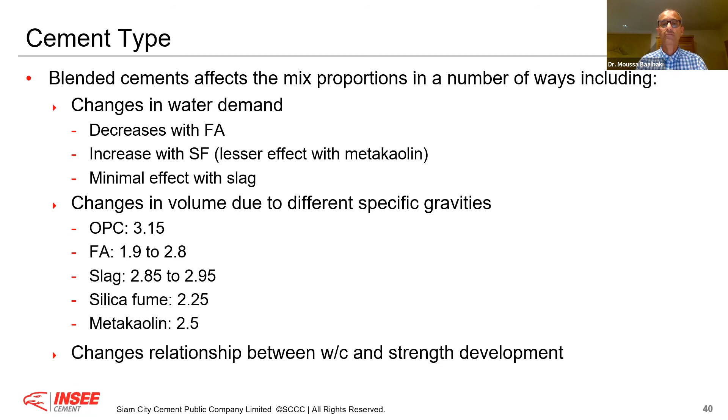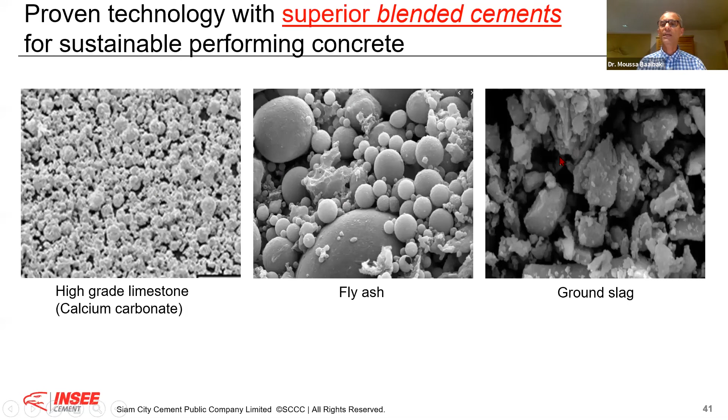Now, these are the different mineral components that we use, for example, in Sri Lanka: high-grade calcium carbonate, high-grade limestone, fly ash from Norochcholai - this is from our own quarry - and ground slag we bring from our operation in the region. This is what we call superior blended cement, for sustainable performing concrete. We will discuss it. Therefore we have different products, and all these products you see have received the green mark certification, and they have different value propositions.

For example, this is Marine Plus, this is for high strength, that is for high performance concrete. That's why you see the value proposition is different, therefore we have different products.

As engineers now, you understand - it's like if I have a headache, if I go to the pharmacy, you can buy Panadol, but you can buy Panadol Extra, depending on the level, how is your headache. That is why it's not one fits all. It's not that one OPC fits all, no. You have exposure conditions. Therefore, as an engineer, I want you to keep this in mind - today you have a panoply of solutions, and you need to take this into consideration.

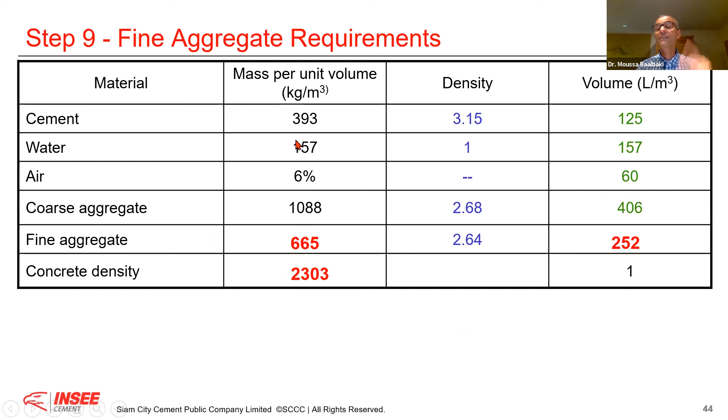This is why it's really important. This is why very often, okay, there is a lot of kind of complaint on the cube test. The difference can come from there. Therefore, if I take my cube and I am not controlling well my water cement ratio, you can find some big variation. That is why very often when we design, we add 10 megapascal on top.

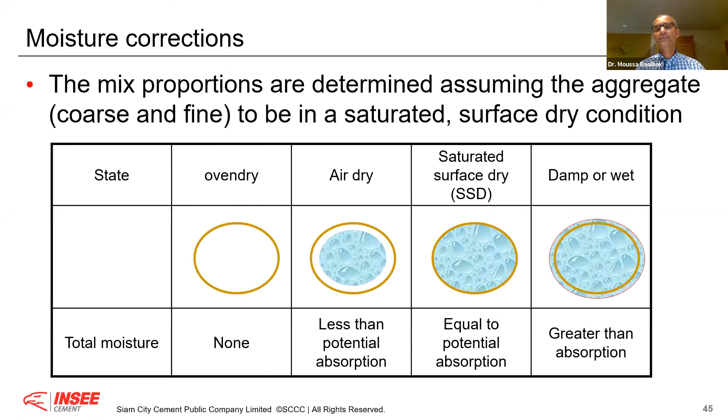Now, the calculation, I mean, is very simple. It's not difficult, the calculation. And the calculation is that for the batch, you have always to take your calculated weight according to saturated surface dry condition. After, you have the moisture of your aggregate and you have the absorption. Okay, therefore you just apply a formula, very simple formula, where you multiply the SSD condition by the difference between the moisture and the absorption.

Let's say if the moisture is 4%, my absorption is 1%, that is 4 minus 1 is 3. If I multiply 3 by 650, that is how you will do it. That's the same for the correction for the water. Because if I add 9 liters of water, I should take it out from the mixing water. You agree with me? Otherwise, I have more water than I should put in my concrete.

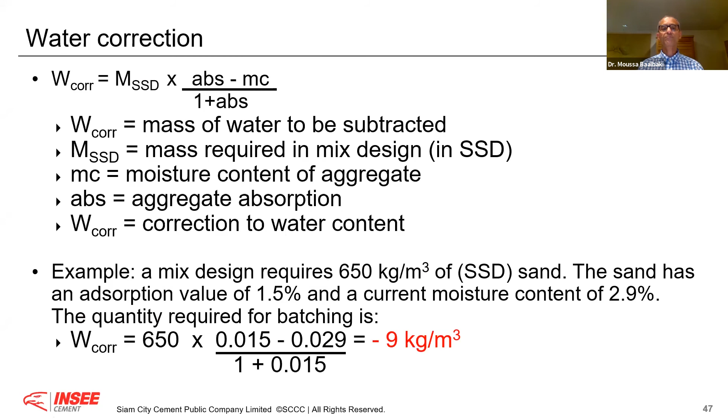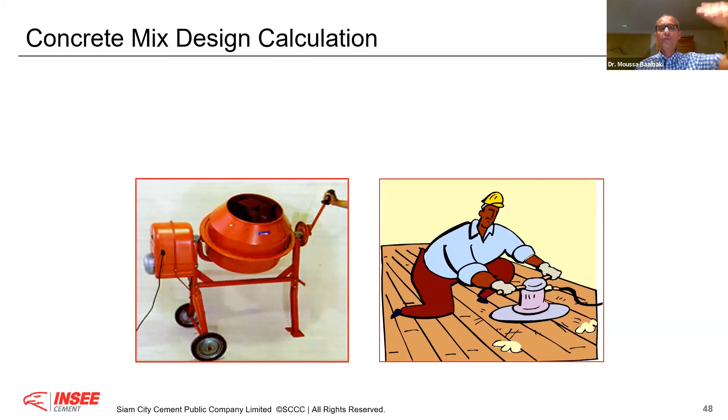Okay, so with this one I went through the 10 important steps of how to design your concrete. Now the last step is to do a trial.

To do a trial, you have designed it, you do a trial, you go to the lab, you mix your concrete, and you characterize it with the properties you would like to assess. For that, I have an exercise that next time we will do together.

For example, you are requested to design a reinforced concrete slab for a terrace hotel in Galle Face. It's 200 millimeter thick, facing the sea water but not in contact with it. 25 megapascal is the 28-day specified strength, and the slump is 150 plus minus 25.

From the statistics, the standard deviation is 2 megapascal, and there are 30 consecutive tests available. These are the specifications, the conditions for the design.

After that, you have your raw material. You have a coarse aggregate. You are the quality assurance manager of this ready-mix plant, for example. You have your aggregate - let's say well-graded crushed aggregate, 20 millimeter nominal size. That's the maximum size you have.

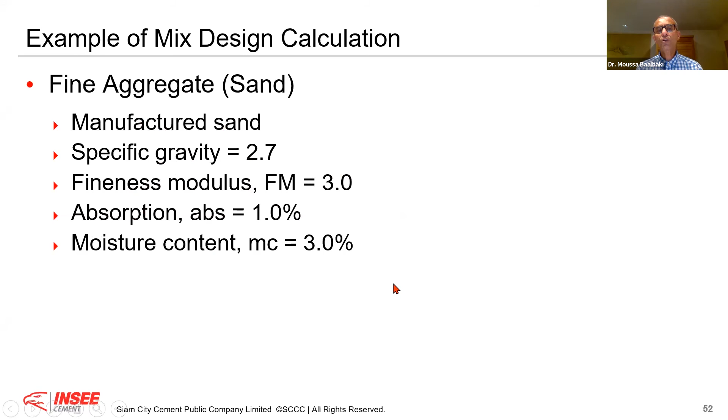Now the sand - it's a manufactured sand. The specific gravity is 2.7, the fineness modulus is 3 - this is what you get when you do your sieving. The absorption is 1%, and this sand has a moisture content of 3%.

Now we also use admixtures. As a ready mix, you use super plasticizers, and the manufacturer recommends 1% by weight of cement to achieve 20% water reduction. This super plasticizer has a specific gravity of 1.1.

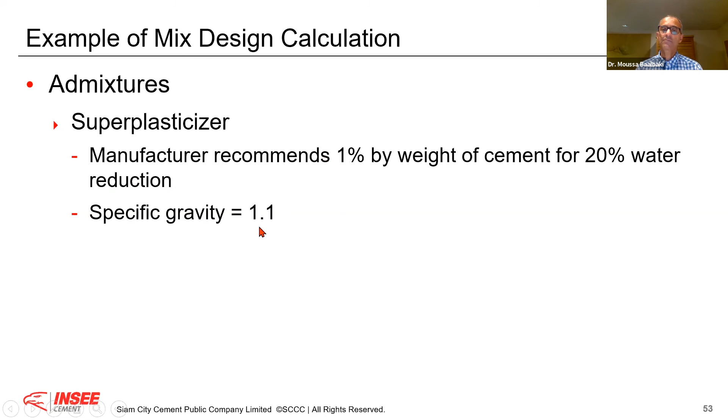Now, what we will do next time - you see I have put all the steps from 1 to 12. Therefore, from the information you have got, we will calculate the concrete mix design to meet the condition and specification by following the 12 steps of the absolute volume method based on EN 206.

That is what we will do next time. I will take the first 15, 20 minutes, and we will go through it and correct it together. Don't feel lost - you will get this presentation, we'll do the correction together, and you will have the document with you.

Also, when we have more mobility, we can form a group of 20 and you can come to me. I can do another case with you - you design it, we design it together, a totally different case. You can bring a case if you want, and we do the concrete together in our wet lab, just to really walk the talk.

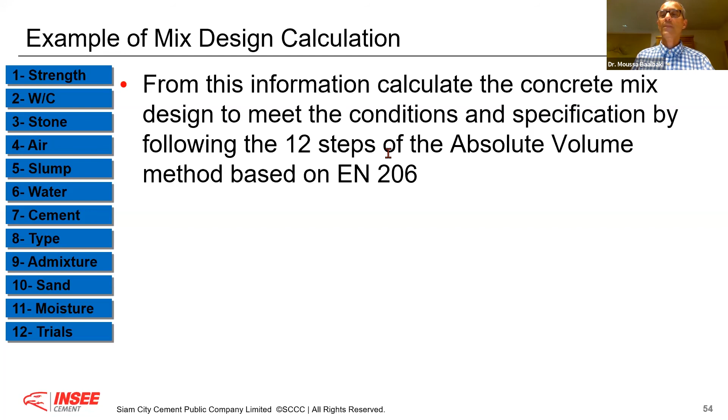Let's put it like that, so that you get used to it. Learning by doing is always good - do you agree with me? Okay, thank you very much. I took 10 minutes more, sorry for that. Probably I started 10 minutes late, but anyway, no problem.

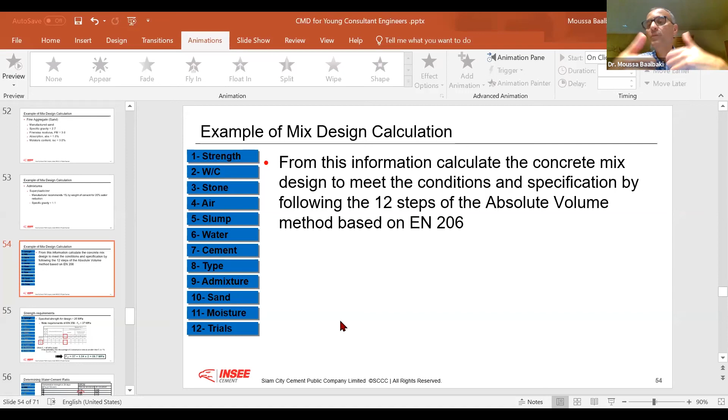It's okay. And the other question, could you please explain what quality of cement is affected when different ingredients such as FA, SF, or slag is added to cement?

Yes, this is a very important question. It's why the next webinar I'm going to discuss this in deep, because these are what we call supplementary cementitious materials. When you talk about slag, fly ash, silica fume, pozzolan, limestone, burnt oil shale, or calcined clay - these are all materials that can substitute the clinker, and they participate in what you call a pozzolanic reaction, or a filling effect reaction, which is physicochemical, to provide you a certain resistance.

When I say resistance, compressive strength, for example. And at the same time, they also improve your permeability. But I have a presentation for that. I hope that in the next webinar, the participant will be present and will see exactly what we are talking about. These are really what you call mineral components or supplementary cementitious materials - it's a pozzolanic material, let's put it like that.